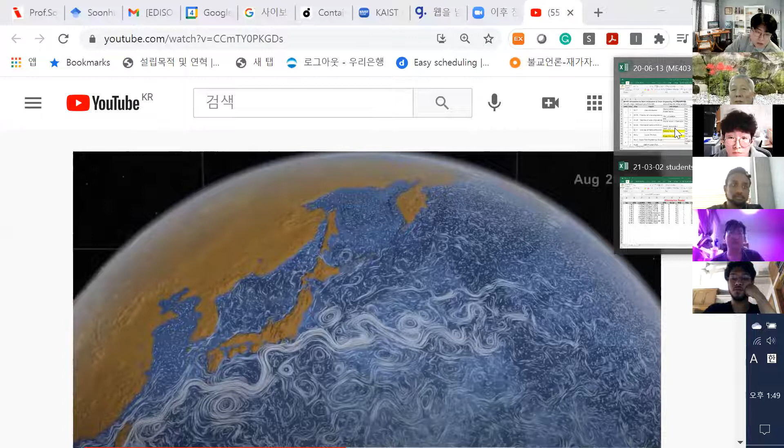So this one. This shows you the schedule of this class, but from last year. So I will revise this one, but it is just a sample.

For the beginning, say up to 3 weeks, I may have a lecture alone. But after 3 weeks, student lecturing starts, and also discussion. So this class is divided into 3 parts every time.

75 minutes is divided into 3 parts of 25 minutes, so that student lecture should be about 20 minutes, and also discussion time is around another 20 minutes. That discussion is led by one of you.

That is the class organization. This time I tried to switch the sequence of my lecture. Last year I started my lecture, and then second term group is student lecture, and then student discussion. But this time I'll try to do it differently: students start lecturing 20 minutes, and then myself will be lecturing 20 minutes, and go on to discussion led by one of you.

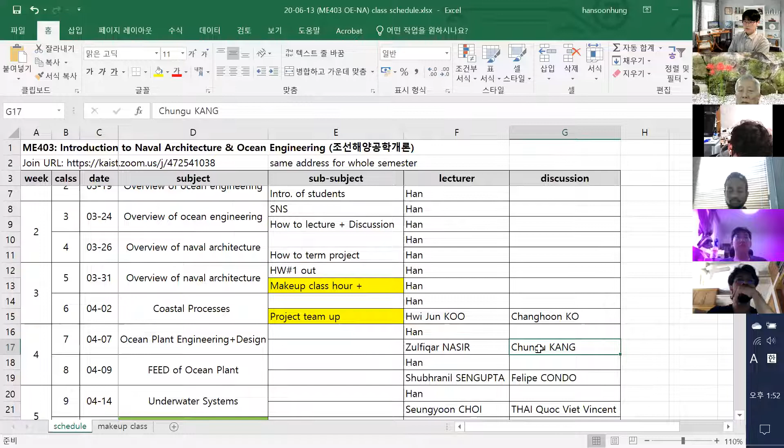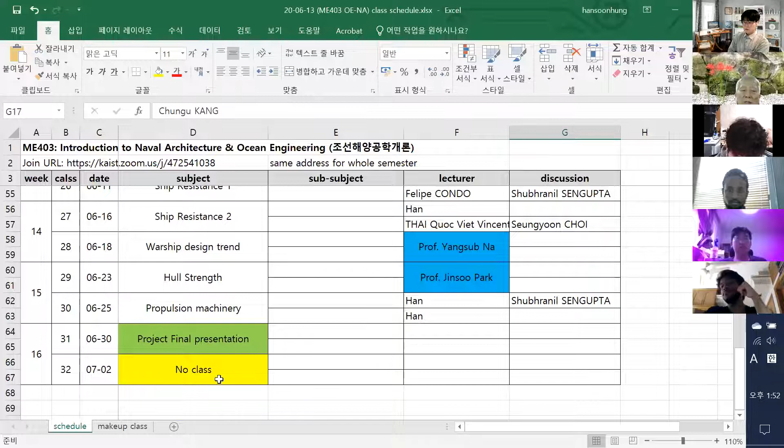I put your names here. Project proposal should be 3 times: project midterm, and project final. And exam is only 1 time, midterm exam, written exam. It will be open book.

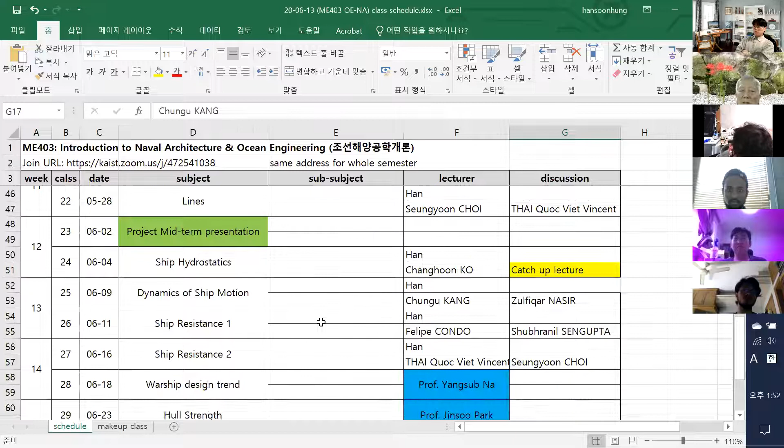There can be some invited lectures. Last time it was Professor Na, who was an old Korea Navy officer. And Professor Park is coming from Hyundai Heavy Industry, or a shipbuilding company.

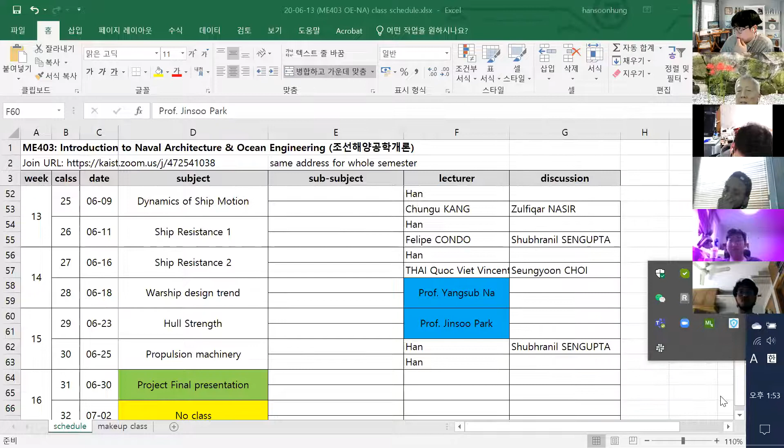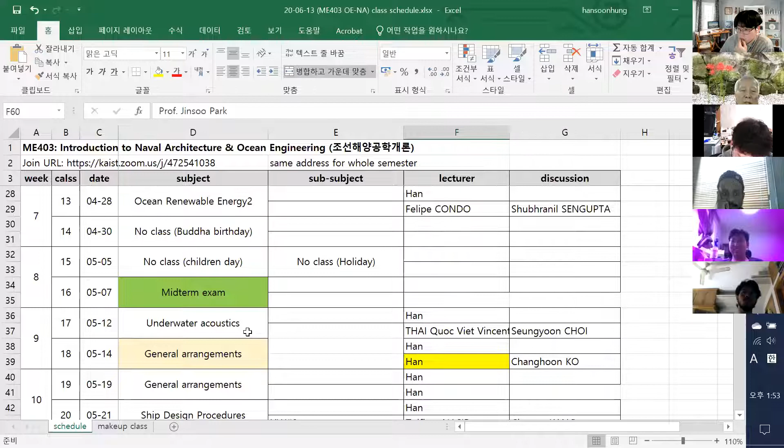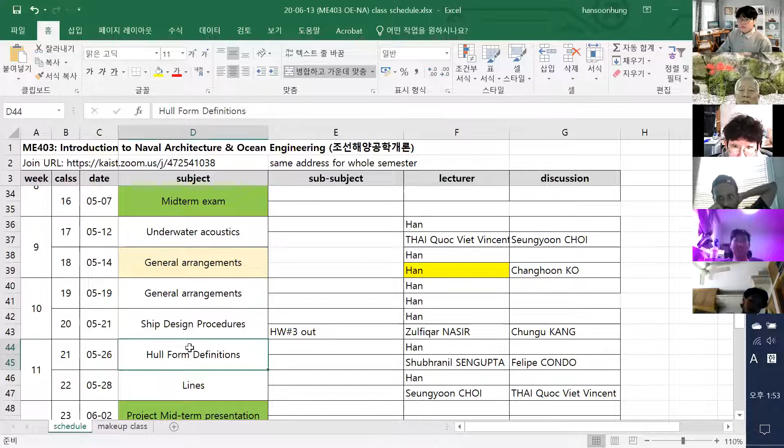One change can be that we start from naval architecture classes first. Last year, ocean engineering started first, with the subject starting with coastal engineering, ocean plant, something like that. But this time I will try to cover starting from shipbuilding, naval architecture, general arrangement, and ship design procedure, hull form, something like that. So I will modify this schedule for this semester and hand it out next week. All right? Okay, then any question?

No. So I can continue my lecture.

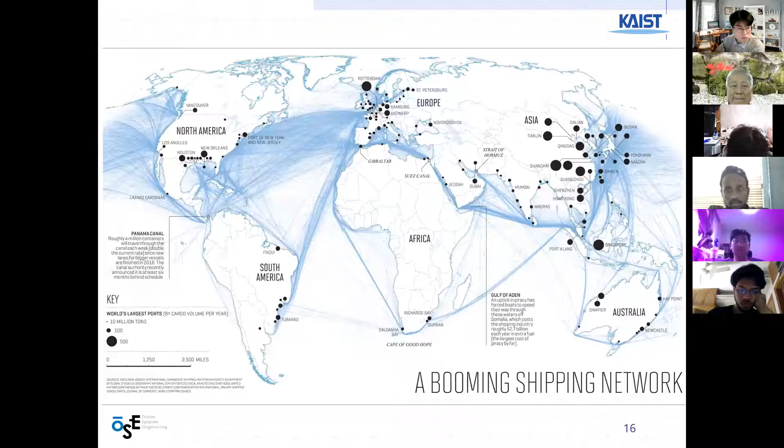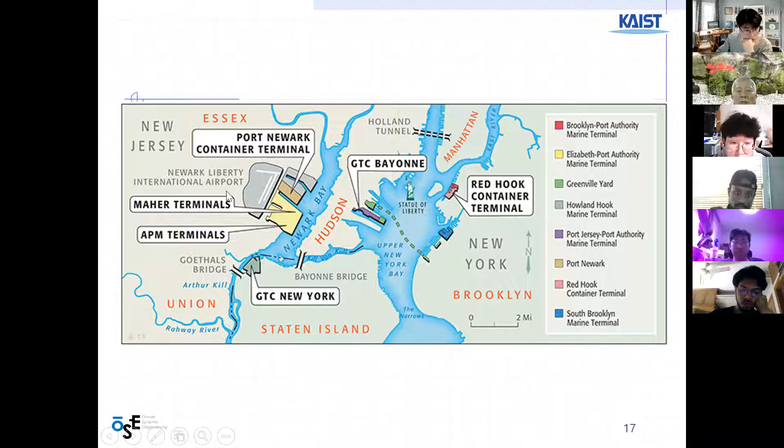This is a private terminal, owned and operated by a company. Maher and APM are famous terminal operation companies — they rent a larger area of the port from each nation to operate. On the right-hand side is Red Hook container terminal 2, but its size is not so big, and there are other smaller ones, with New Jersey at the left top corner.

So each offshore platform has riser pipes to transport the oil and gas from the bottom of the sea.

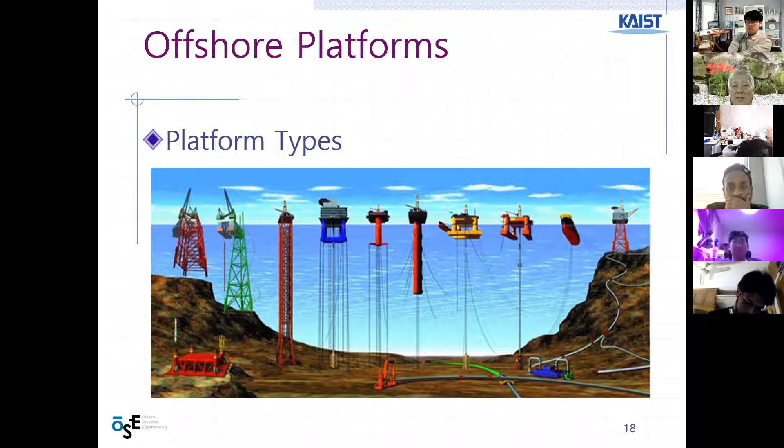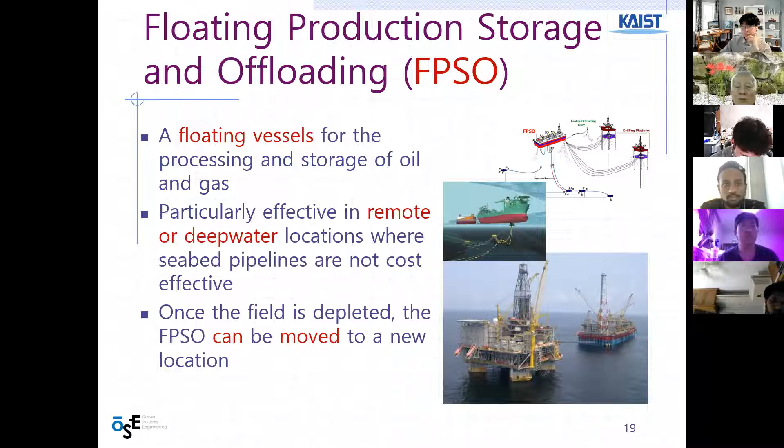Because you may remember Fukushima is a city name in Japan where the nuclear power plant exploded. That was a very big disaster in recent years.

The problem was that the cooling water pump was not operated because of electricity issues. But if you build a nuclear power plant near, around, or above the water, there is so much water there. Actually, the Fukushima plant was near the sea, so there was enough water, but the problem was the pumping system of electricity.

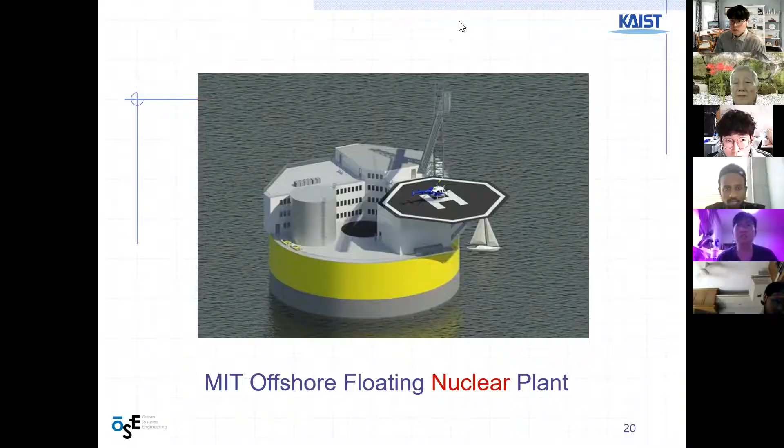Anyway, MIT proposed a nuclear power plant, or offshore power plant. All right, questions? No? All right.